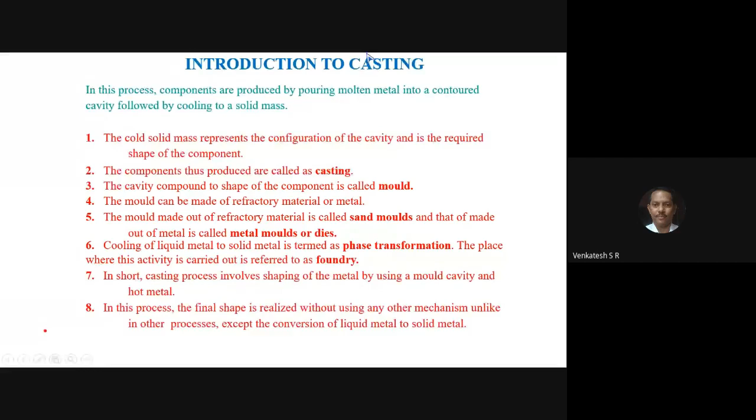Last class we discussed how to produce the casting. Before that, we discussed how to produce a component using various manufacturing processes. So, in the introduction of casting, what are the things required for casting production? First, you have to make the casting by using a mold. The mold may be made of plaster of Paris or a permanent mold, and the produced component is called casting.

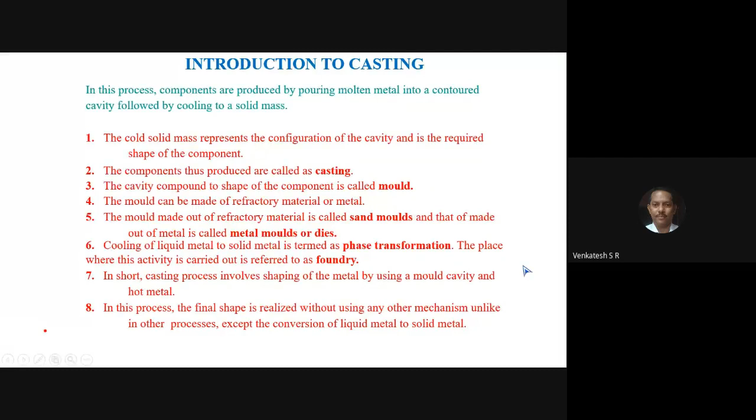Next, the metal required, whether ferrous or non-ferrous, is made into liquid form by using heat. Then pour the liquid metal into the mold cavity. After solidification, you will get the component. The component may be a little bit larger than the required one. After machining and finishing, you can produce the component. So this is the process used for production of casting.

Next, come to the point. Already we discussed the pattern. The pattern is nothing but the same size and shape of the component, a little bit larger than the component required. Next, the cavity which is required to produce the component, that is the mold preparation. And next, core making. Core making is nothing but producing holes in the casting. Just like the chalk piece we use in the classroom for writing on the board, the same type of cores are used for producing holes in the casting.

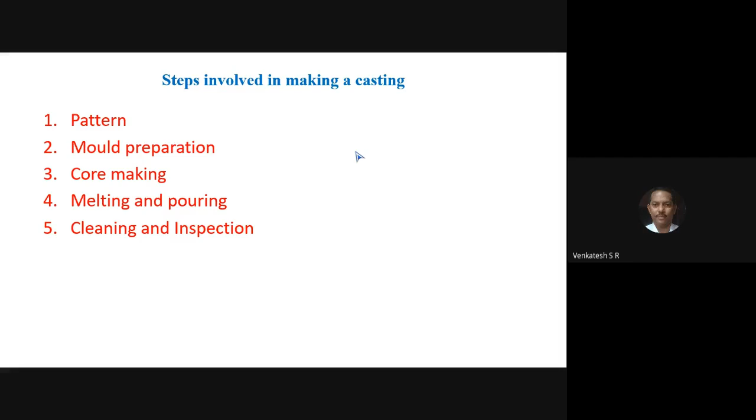Number 3, core making. Number 4, melting and pouring. Number 5, cleaning and inspection.

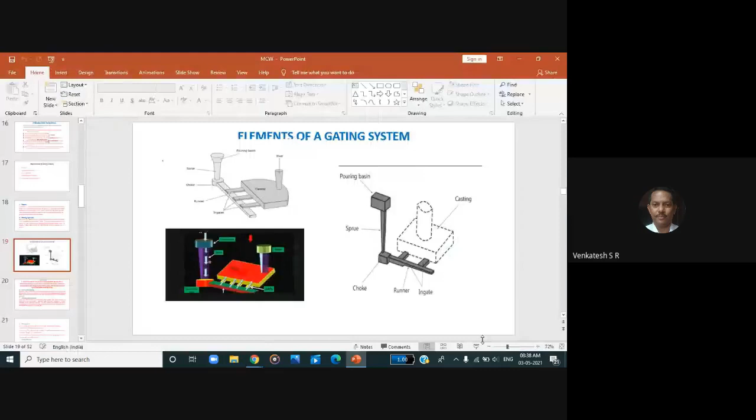Next, write down elements of a gating system. Write this diagram. Write down the rough diagram. Clearly show the pouring basin, sprue, choke, ingates, casting, and riser. Write down the rough diagram of this. You have to explain this diagram.

Elements of a gating system. See, write down the rough diagram. Pouring basin, sprue, choke, runner, ingates. This is the mold cavity. In bracket, write down casting.

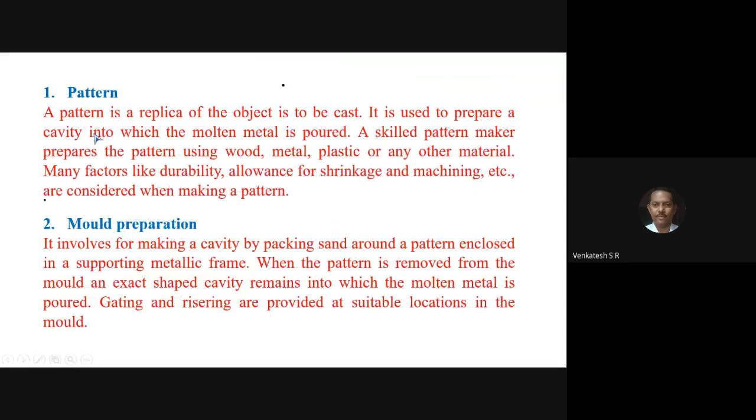These 5 steps are very much required for production of casting: pattern and pattern making, mold preparation, core making, melting and pouring, cleaning and inspection. And these are the elements of the mold box, or elements of the gating system, for the steps involved in making the casting. That is the mold box.

Here there will be 2 parts. One is cope, the other one is drag. The name itself indicates the upper part is always called cope, and the bottom portion is called drag. If a center box is present, that is called cheek. In that, they produce the mold cavity by using a pattern or hand cutting.

Next is sprue and runner. As I told you earlier, this is the sprue and this is the runner. So in this section, the metal flows into the casting. The name itself indicates runner, that is where the metal flows into the casting.

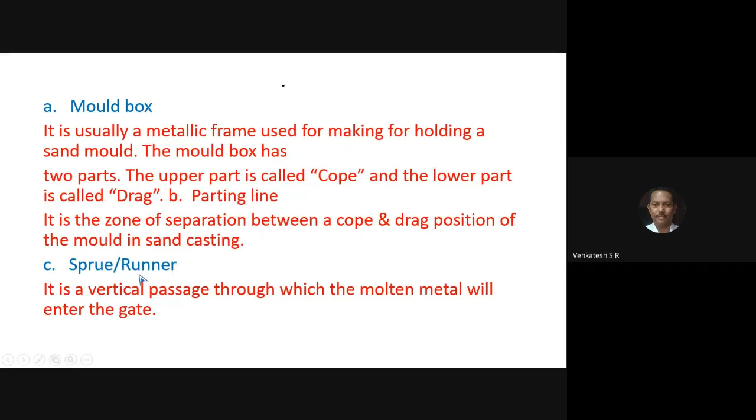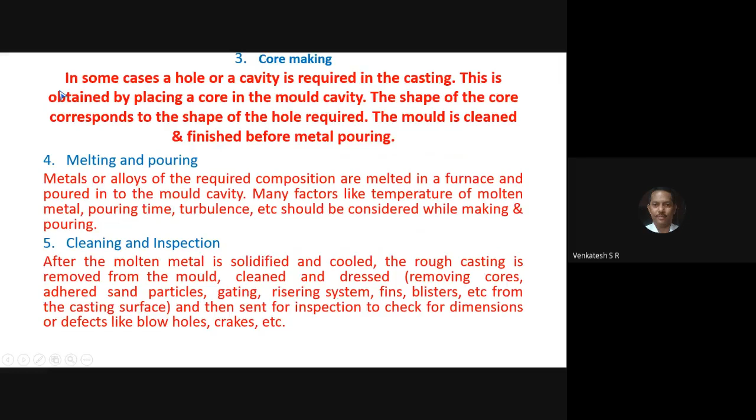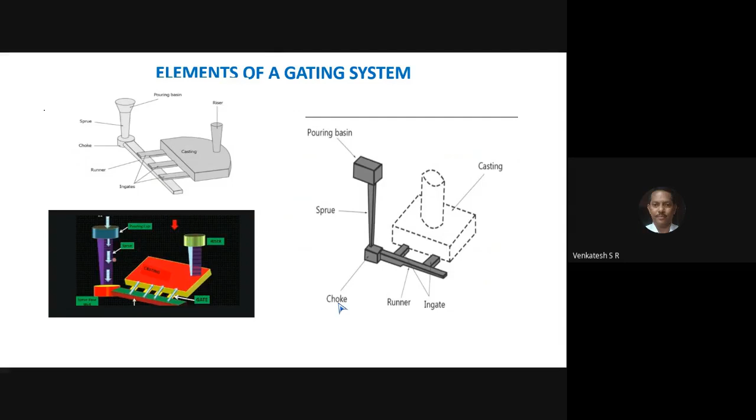Next, write down subdivision C, sprue slash runner. Subdivision D, choke. All of you observe here. This is the choke. Sprue, after that choke. Next, runner.

Subdivision E, gate. First you write down gate, put a colon and hyphen, in gates. Subdivision F, riser.

Next line write down subdivision G, mold cavity. Subdivision H, core. Last one, subdivision I, core print.

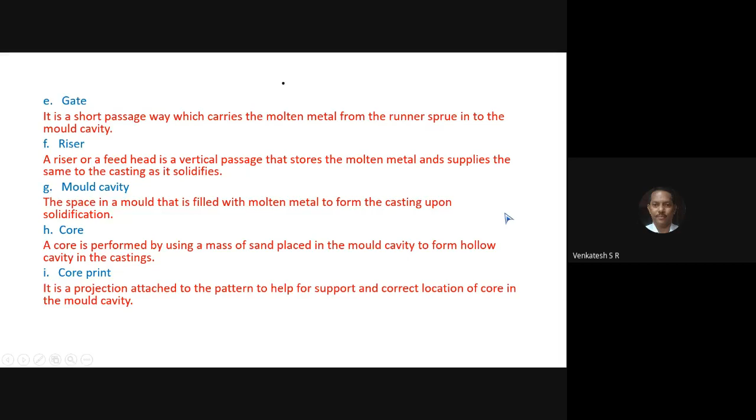Next, in some question papers, you have the flow diagram for making of the casting. Write down flow diagram or flow chart indicating the steps in a casting.

Remember, throughout your life, always write the title in uppercase letters, in notes or in the examination. Wherever you write the title, always write it in uppercase or big letters. That is the international standard. If you write in uppercase letters, that indicates this is the title of the explanation.

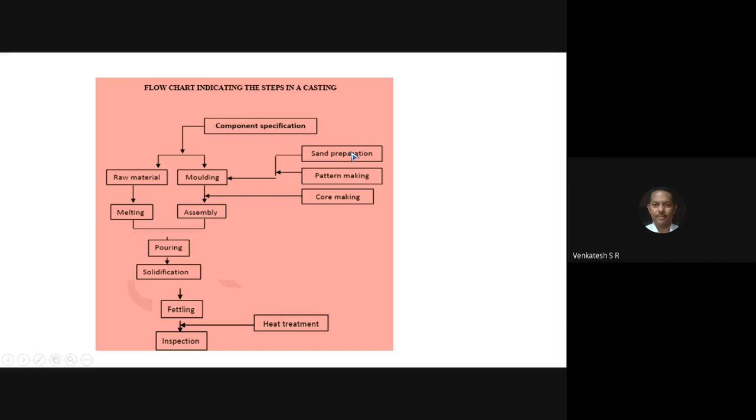The mold can be produced by using green sand, dry sand, plaster of Paris, or permanent mold. Again, here there will be two steps. One is the mold is prepared by using sand, and using pattern you can produce the mold cavity. In the molding step itself, you have one more step, that is core making. Suppose you have a hole in the casting, then make the core manually or by using a core shooting machine.

By observing this screen, you can study the steps involved in making a casting. See, all of you, write down this flow chart or block diagram. For mechanical engineers, this is very important. Write down this flow chart. As I explain this flow chart, along with that, you write down the flow chart.

See, after making the mold cavity using pattern and fixing the core inside the mold cavity wherever you require the hole, the next step is assembling the core and all the things, print and painting of the mold cavity, and all other operations are carried out in the assembly stage. After melting and completion of the assembly, bring the liquid metal through the crucible or container from the furnace to the foundry section through ladle, manually or through crane. Bring the liquid metal to the mold section, then pour the liquid metal into the mold cavity. That is carried out in the pouring step.